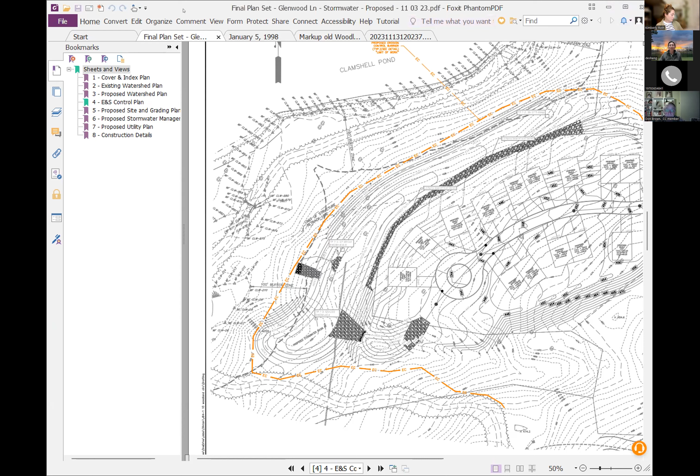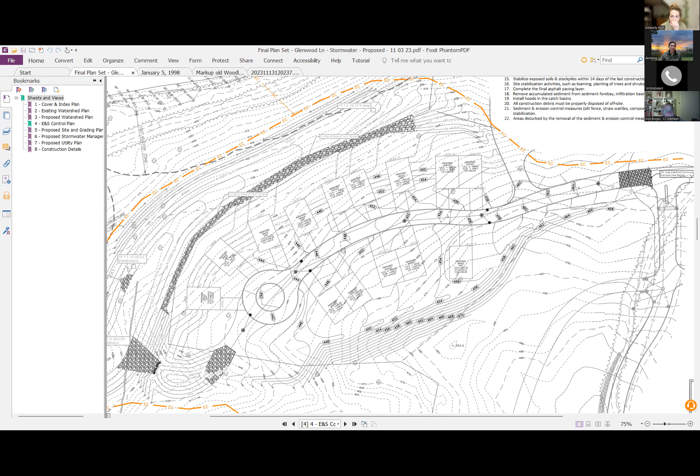Right, so this is the Glenwood section. If I enlarge it, you can see those units are all there. The original design is basically the same location, but they didn't have the soil testing. This section was much shallower with the ledge, and it's in a much lower grade. So we made a very broad, shallow swale coming in, which will catch pretty much the same stormwater.

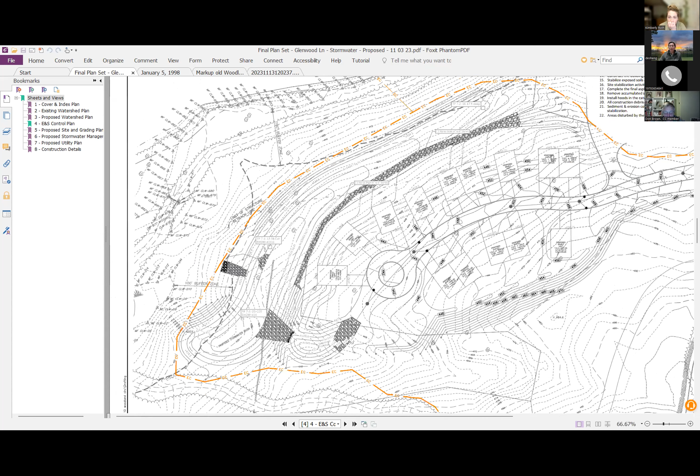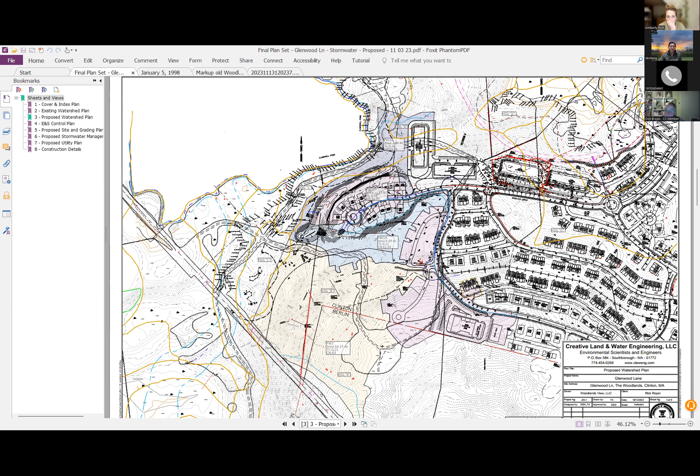So if you go to the watershed plan, you will see the watershed coming here to this basin at the pink area. So we shifted it. And also, if you're looking at it, we have a sediment basin, and also a long swale behind those houses.

So we didn't really change anything, to be honest, from the road drainage. I don't see any difference from the previous approved plan. We used the new NOAA Atlas 14 data, and that's basically the difference. If there's anything we changed, as I said, it's basically the basin. So I don't see any difference from the compliance standpoint.

Last time, the stormwater management standards were pretty much the same, didn't really change significantly, except that the recharge requirement was updated, I believe, from the previous design. And the precipitation data is updated by the NOAA Atlas 14, which we applied and complied with fully. But we were waiting for the peer review to comment on it. So other than that, I don't think we changed anything. We separated the watershed from the previous one, so this is the watershed area contributing to the Clamshell Pond side.

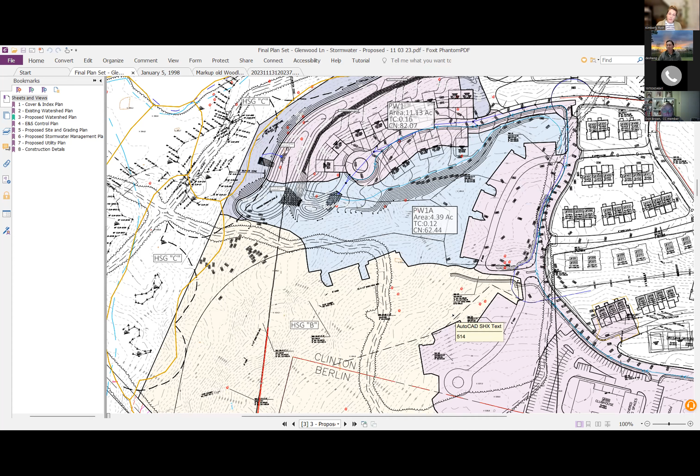In order to get 80% infiltration off of an infiltration basin, it requires pre-treatment. So what is the pre-treatment for the infiltration basin? The pre-treatment is this - the road drainage deep sump catch basin goes into a pretty much separated big forebay, which is much bigger than actually required.

So you have a sediment forebay - great, yes it has, and then they go into a basin. This is all separated by a good 5-6 foot berm, so it's almost like a little basin in the forebay cell. So this two adding together is a 44% removal, whether you consider that an infiltration basin or not. If you consider it just an extended dry detention basin, they don't even require 44%. So looking at it both ways, it will meet the TSS removal rate.

Okay, thanks, Sheng. I think that's most of my questions. I think there was some discrepancy on whether or not it meets standard 2, but we're going to get a third-party review on it, so this is just more for conversation.

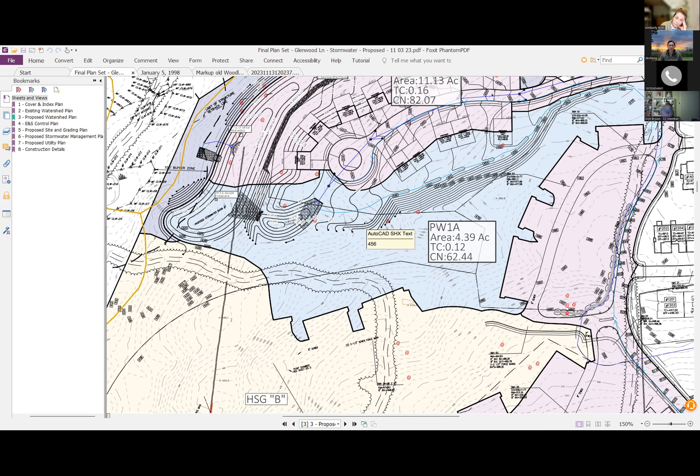The two issues are about the peak flow. In the DEP stormwater management standards, they don't actually have a volume requirement. So I calculated, if you look in the report, the volume is just a very minor increase, but the peak is significantly less. We did all storms from 2 year to 100 year. If I don't do the middle ones, it's a little bit off, but for 100 year it's a perfect match for volume. But for peak, that's what standard 2 actually requires.

The peak discharge for the 2 to 100 year storm is less than existing. They don't have a volume requirement. The volume is only required for recharge to the groundwater, which we far exceed. Just the static volume itself will meet the recharge requirement, so we don't even need to count on infiltration for that purpose.

Any questions from anybody else or comments from anybody else on the commission? No, aside from waiting on the DEP, everything you already highlighted, and I would also be leaning towards the peer review.

Do we take a... Can I make a motion to go out to peer review? I mean, third party review. Do I have a second? Dawn, would you be interested in seconding a motion for a peer review on the stormwater report? Yeah, I second. Okay, take a vote. Rebecca, aye. Dawn, aye. Okay, so we will get a peer review on that.

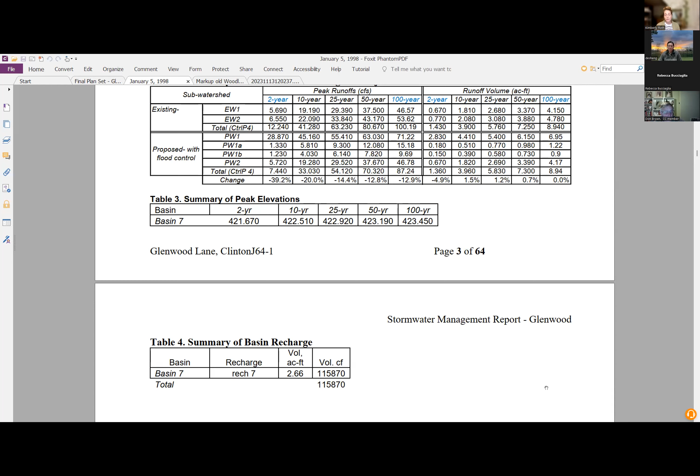Right now, the new information was introduced. We discussed the new information. We don't have a file number from DEP, which means they haven't completed their cursory technical review, and we can't move forward without that. We're also getting a peer review on the information that was submitted, so we will be continuing pending that file number and pending that peer review.

So does that mean, Kim, that no activity is supposed to be going on at site? No, it means that they can't build this stormwater basin until we approve the plan and design.

If there's activity going on in the woodlands, which I've received some complaints about, Desheng pointed out where that was on the map, and it's outside of our 100-foot buffer zone to the pond, which means it's outside of the Conservation Commission's jurisdiction. It's just for soil testing, which is exempted under the wetlands protection act. We don't have oversight of the entire woodlands development complex. We only have jurisdiction over 100 feet from the top of bank from Clamshell Pond.

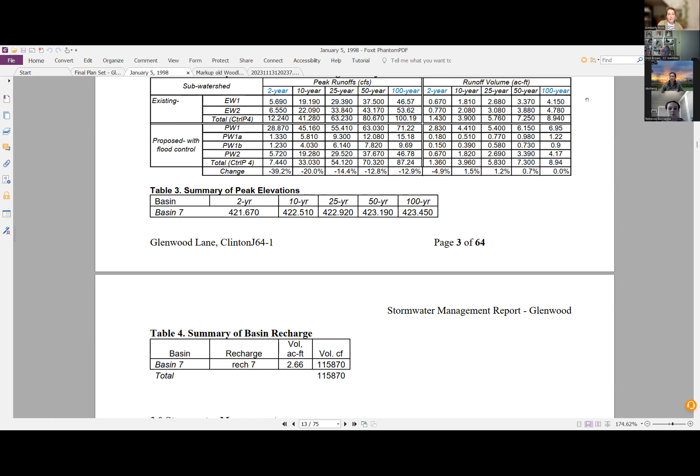We'll see you next month, Desheng. You'll keep us posted? Yep. So whatever progress—we'll send a message out once we have an idea of what's going on with the peer review.

Everybody's so busy these days. I know, that's my concern. Myself, I'm totally jammed. If you want me to do another one, it'll probably be two months.

Well, we'll see what happens. We can always—if the peer review doesn't come back, you guys can request a continuance, so you don't have to come and say, you know.

Or to start, do we have any town engineer or contracted town engineer? No. Okay, yeah, I feel this case should be relatively simple.

I understand, Desheng, because we're already going to kick the tires on all of this. I know the standards, but I'm not an engineer, and I'd just like to have a peer review on this.

Yeah, it's not like there's a significant change in any layout. Well, we'll continue this so we can have this conversation next month. Okay, thanks for your time.

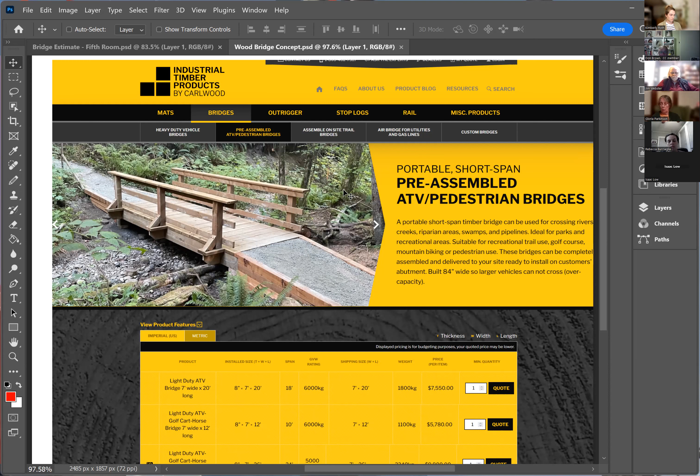Again, you can see for this type of design, it is wooden, and therefore so is the bridge part. We're really interested in having that Trex non-slip surface for the ADA aspects of this project. Also, with the wooden bridge, there's going to be maintenance costs. So given our druthers, we're in favor of - go back, Jim, to the first one that would be customized. Again, I talked to the gentleman at the firm, and they said they couldn't show us what it would look like because we'd have to pay $400 for them to produce a picture.

We don't actually have that money yet until we come out of this situation of the NOI hearing, because at that point, the whole project gets turned over to the town, since the project is over $50,000, and therefore goes to the town building committee.

The funding for this was discovered to still be in the town purchase money of Rauscher Farm. There was an article, not this June but the June before, that allowed what was left over in that budget to be repurposed, since it could only be used for Rauscher Farm, to make ADA accessibility improvements there. So there is funding for the project.

So we did meet, Jim, Dave Sadowski, and myself, and we thought it would be advisable not to remove the plants on the side that we have in the design, the seeding for the wetland plants. We all felt it would be advisable not to take them out, because given climate change and everything else, if they are in the design and we need to do something, we don't have to come back and do a whole NOI process just to get more seeding in that area.

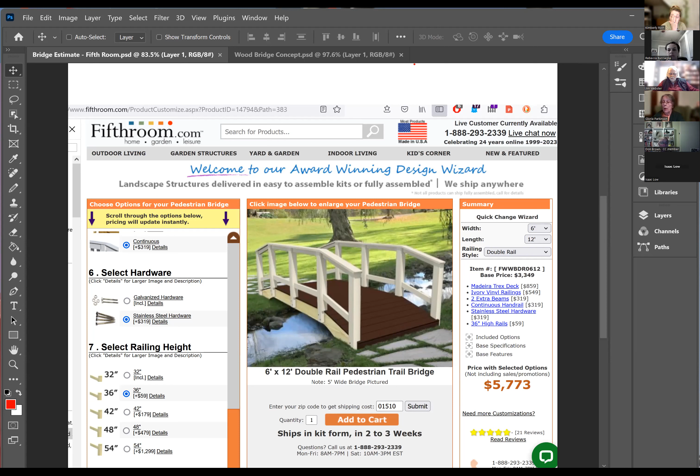It's all buffer zone. Can I make one other observation? I don't know if this is so, but if you look at that area now, by observation it's almost turning into a monoculture, and part of our brief is to introduce diversity on Rauscher Farm. If you go up there in the fall, it's beautiful, but it's just goldenrod going bananas. I've got a photograph somewhere to show it.

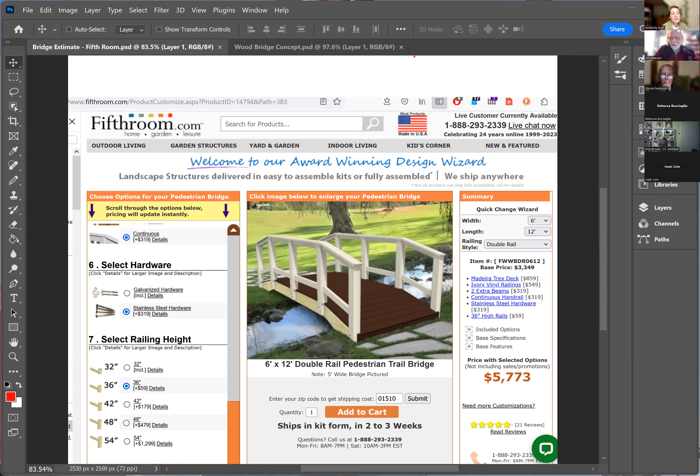So I think this is the replication area on the plan right now. We can't see it yet. I can blow it up. No, I'm still looking at the bridge. Oh, you can't see it? Funny, I see it on my screen. Why is that? We are viewing... oh, maybe you're sharing the program versus your screen, so you can't move between. Oh, you're sharing Jim's screen, is what it looks like. I just don't know how to do that. Just stop sharing and then share again. Okay, and share again. There it is. There we are. Okay, I'm trying to navigate this thing. Oh, here. So here's the replication area right here.

What we have right now is we had to stop and direct foot traffic to Clamshell Pond. We blocked off that area, and it's been very happy, because people used to walk through it as a path. That area has become exceedingly delighted by the fact that no one's trampling through it. Sometimes when we have these impacts, if there's still a significant seed bank of the other existing plant varieties, it will just regenerate itself, and that's clearly what's luckily happened here.

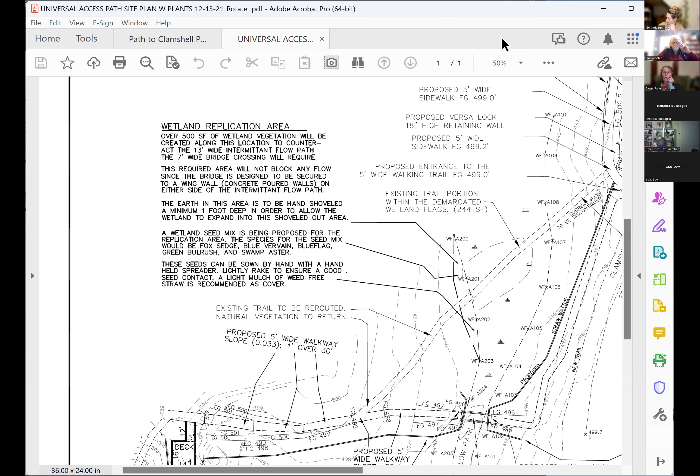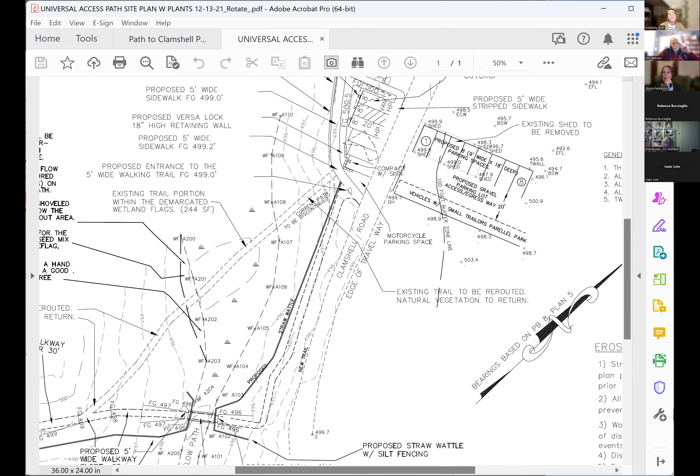So, coming back to this, would we now need to redo the whole design? I think because it's minor, I agree with what Rebecca was suggesting: that we write a condition allowing Rauscher Farms to do some plantings in the proposed area to introduce species diversity. We could write it that way, and then note that it's no longer considered a replication area, since no BVW impact is proposed. It's more of a restoration, or you could call it a resiliency planting - climate resiliency planting. That would be great, really an enhancement or something along those lines.

Because we are embarking on doing a climate resiliency review for all of the habitats on Rauscher Farm, this language can stand - we'll just leave it as is. So we believe what we have done fulfills what was requested from that site visit, and we have all the other pieces good to go in terms of handing this over to the town to execute. I think you've fulfilled all of our questions as well. That's my opinion. I would agree.

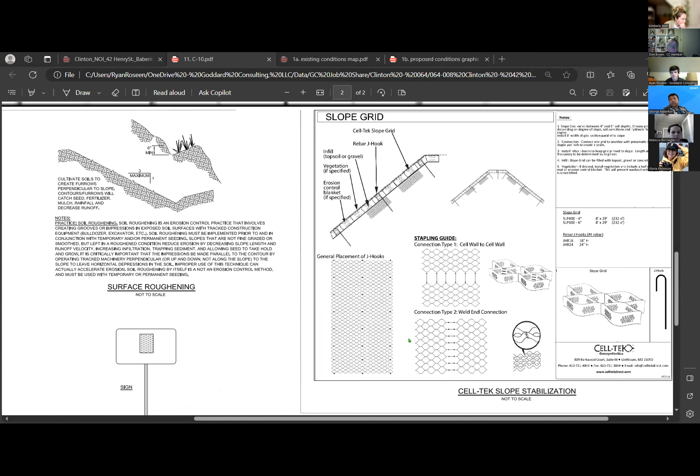And for this larger slope, we're proposing to use the Cell-Tek grid stabilization system - here's a detail of it. It gets put on the slope, anchored in with rebar J-hooks, and then you infill those with topsoil, and we'll seed over it with a native meadow mix and just let it be.

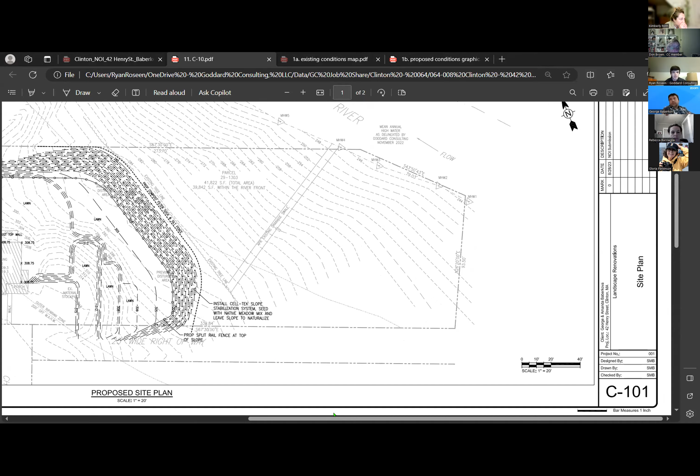So let me go back up here and zoom in a little bit so you can see it better. Along the top of the slope, since it's a fairly steep slope, we're proposing a post and rail split rail fence for safety reasons, and as a physical demarcation not to go beyond that area and not to manage that area once it's planted.

Where's your 100-foot line? So the 100-foot is right here, this dotted line. Let me go to... I had another file open, that did it, but it's hard to see - it's this area here, it barely comes this way. So it is a little bit within the 100-foot riverfront area.

This area is already sort of lawn, so we're just making it into meadow habitat here, and then it'll be left alone. So there won't be any disturbance within the 100-foot.

And then over here, this is really the only new impervious surface - a small retaining wall on this side to create more of a level area along this side of the house. A number of trees on this side, not shown on the plan, are proposed to be removed - I'm not sure on the sizes of those. And then we're planting Green Giant arborvitaes in this area.

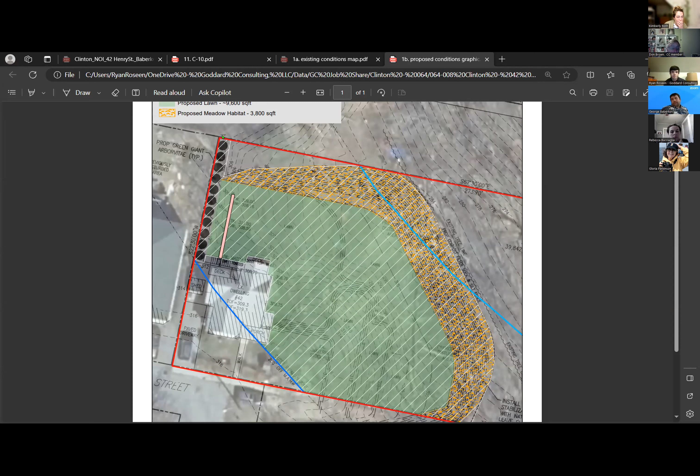So this whole area in green will be lawn, that's where the proposed grading is going to be. The whole orange area is the meadow habitat, and the light blue line is the 100-foot line, and this is the 200-foot line. So that's basically the project.

I'd be happy to answer any questions that you guys have.

I have a couple questions - the Cell-Tek that you're using, what material is that? Is that a material that composts and biodegrades over time, or is that something that will remain in place? I'm not entirely sure - George, do you know? I think it's made out of like plastic or rubber, but I'm not entirely sure.

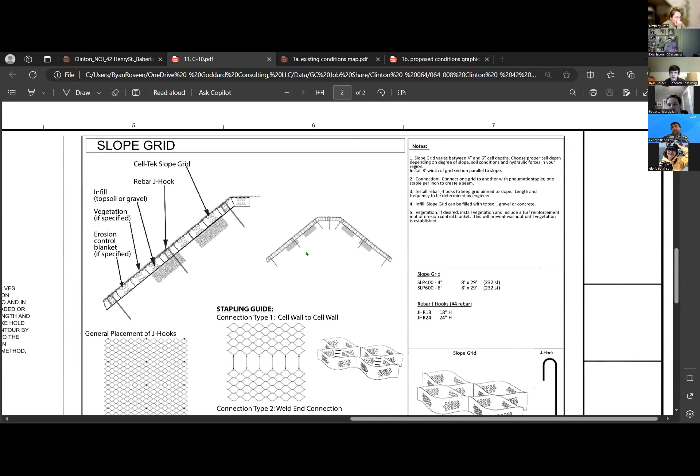George, do you know? Yes - it remains in place to hold the soil in place, as well as potentially, when the vegetation grows, will provide extra support. Right, but so it doesn't biodegrade or compost in place or anything like that? I don't believe so - I think it's meant to be a permanent stabilization.

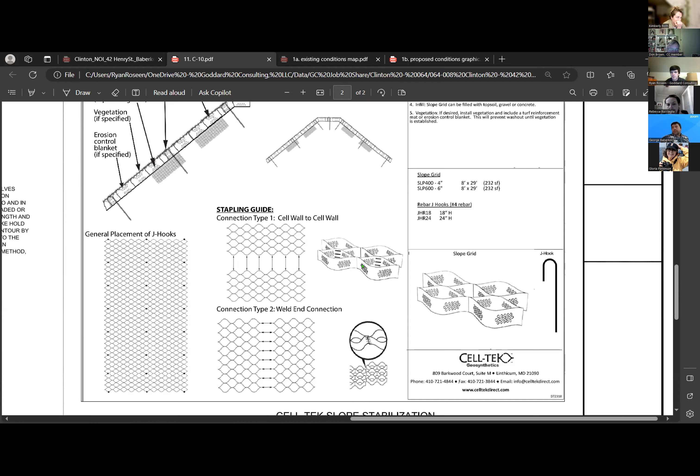Did you include a spec sheet of what that material is in your submittal? I didn't see it - for this Cell-Tek stuff? No, this is the only detail that we submitted. We can probably get some more information on what it's made out of, but this is all the information on the Cell-Tek stuff that we submitted. Okay, thank you.

I believe I sent a bunch of things initially that are in a Dropbox file - I'm not sure if you guys have access, but we can resend them. All I have, in terms of what's been submitted since the NOI, is just Ryan's PDF of the NOI with the plans.

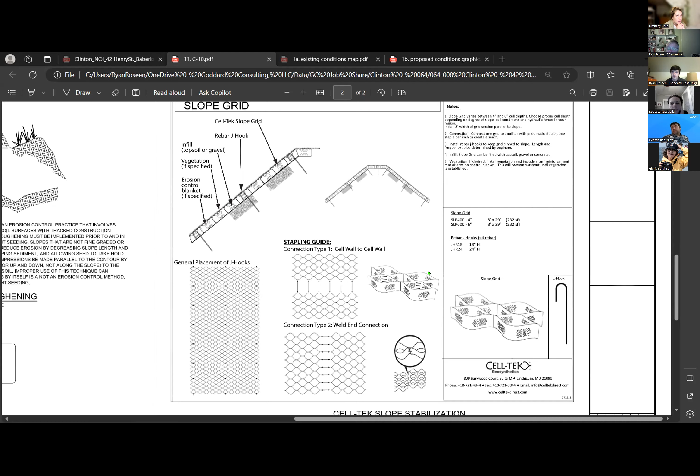Talk us through, Ryan, how this meets performance standards for riverfront area.

So I can go into this, this was part of the submission. We did this under redevelopment because a portion of it, you have the house in it, it's previously disturbed and degraded. It is below that 10%.

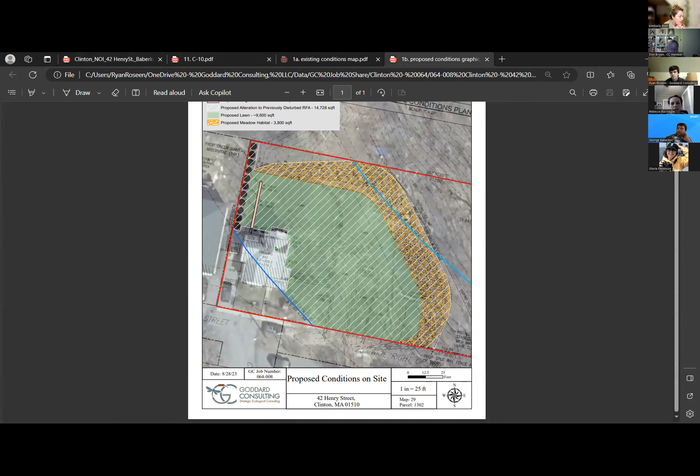That's not how I interpret the regs. If you were to be tearing down the house and proposing a house in the same spot, that would be degraded. It's lacking topsoil, it's lacking the ability to be a functioning riverfront area. Perhaps the top of slope where the driveway was, but lawn is not degraded. And we can't look at the big old pile of dirt as degraded, because this is under an enforcement order, correct? That is not existing conditions that we're now coming into as a previous degraded thing.

So I would like to see you show us how this meets performance standards for 10.584, under new development, or some sort of patchwork between the two. But the slope, the lawn and slope, it does not fly for me that that's degraded.

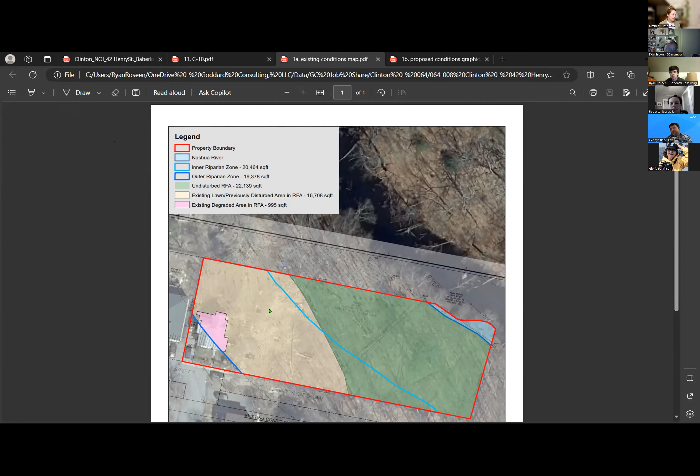No, we're not saying that this whole area, the slope that was brought in, we're not saying that that's degraded. We're just calling the house degraded, and then the whole area where the soil was brought in, the existing lawn, is just previously disturbed. I know it doesn't really mean anything in the regs, but that's how we're classifying it, as those two sort of things.

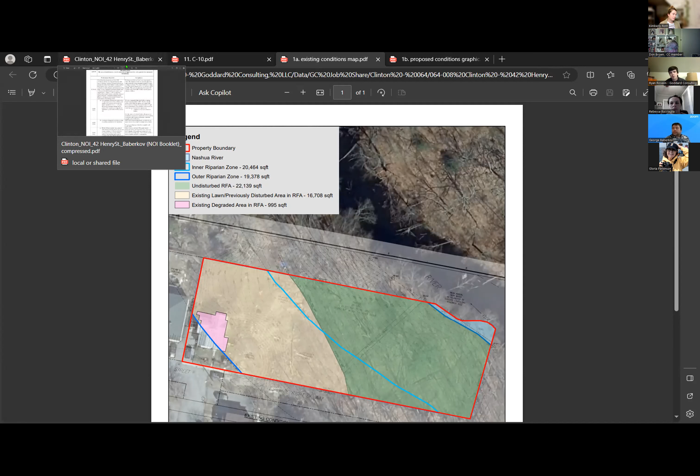But we can submit more information on the new development standards, or sort of a mix, and get back to you on that. That would be really helpful, because I'd hate to start discussing this and going down a rabbit hole and then end up right back to this conversation.

Do you have those calculations, or is that something that we need to continue and reconvene on? So the calculation, so I moved you guys to these calculations here. So existing riverfront, total and broken down here, existing degraded. So I see those.

So one caveat with throwing this under 10.58(4) is the statement that the issuing authority may allow a certain square footage, etc., provided that a 100-foot undisturbed vegetated buffer is provided, and you guys are proposing alteration in the 100. So I understand that you're proposing to restore it to more of a wildflower meadow. You're going to want to call that out more clearly.

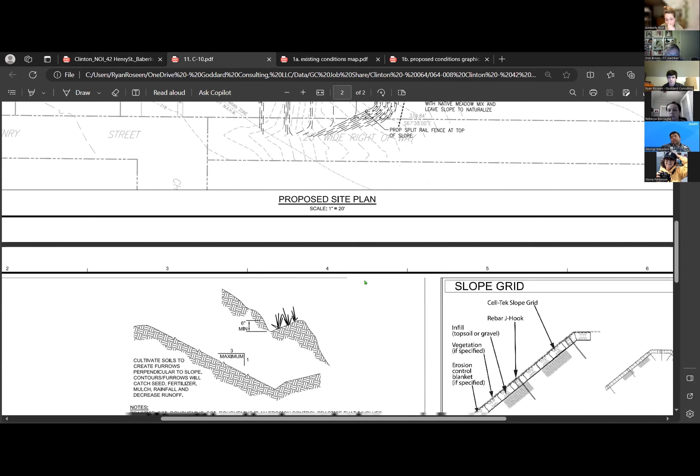That is really steep. I know, and that's why we're using the Cell-Tek grid slopes, because originally we had a plan for retaining walls on all these areas, but that was going to be too costly, and you'd have to get an engineer if they're more than 4 feet tall and all that stuff.

Okay, I'm sorry George, did you say what the slope is? Did I cut you off? You have 1-to-1 at the Cell-Tek, and it basically gets smaller as it gets into the smaller areas.

What was the slope pre soil importation? On the side over here — I can't see where you're pointing, George. Just say top, bottom, left, right. Bottom, where you have the outer riparian zone, it used to go almost 1-to-1 until it hits — I want to say probably 300.

So I'm guessing this is sort of where the pile is. Everything beyond this, all of this over here, and it's hard to see under this, but that's sort of the natural slope it looks like. When you calculate up the other stuff for us, just tell me what the existing pre soil importation slope was, and then what the proposed slope is, just the numbers. So we have it in the documentation, and we can talk about that. Okay.

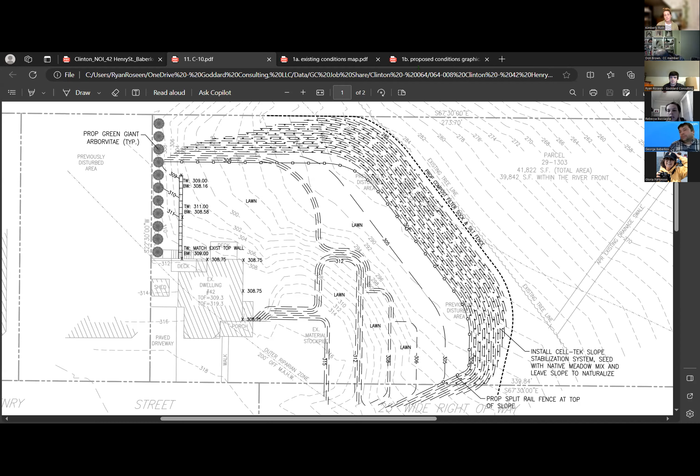Okay, next we have a notice of intent for 4 Craig Drive.

Hi, this is Patty Burns, can you hear me? Hi Patty, I can hear you. So we're back again for these 4 trees and all the other stuff, but yes, go on. The current situation that I'm aware of is that we submitted an NOI in early October or late September to the town and to the state, and it's still sitting on their website as submitted, but nothing has moved forward.

You have a file number. Okay, we didn't see it. Did you go to the NOI lookup page? I think so. So it's EEA, I can drop a link in, just for your benefit. We only saw submitted, so we figured it was still under review. So that's good that there's a file number.

Great, hold on one second. Everyone in the meeting, in case you're interested, you can look up any NOI filing in the state this way. So let's go to Clinton, just gonna double check. 4 Craig Drive has been issued file number 135-0302.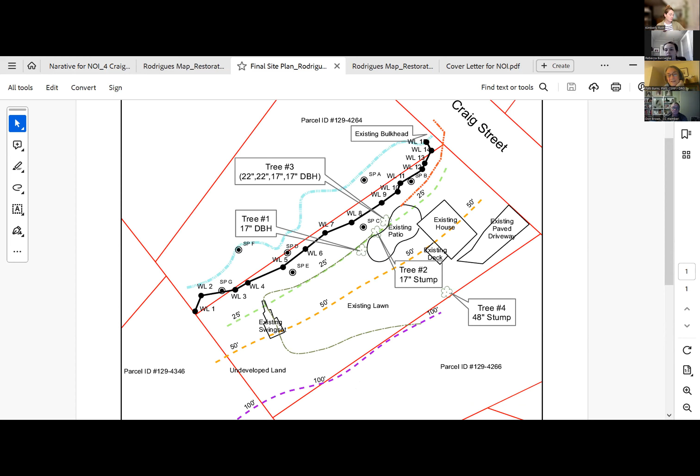How long did it take you to get us the notice of intent? It's not like you've been in front of us every month with the same notice. We had - because we lost 2 months of the notice to the abutters. It took 2 months for us. What is that, how is that our fault? The town didn't provide it to us. So it's somebody else's fault, not the Conservation Commission's.

Okay, so the answer to the question was, we're taking it down to grade for the restoration work, as that was part of the plan. Just to refresh our memories - I know we're not putting in something that grows as tall - is there a replacement proposed for the trees?

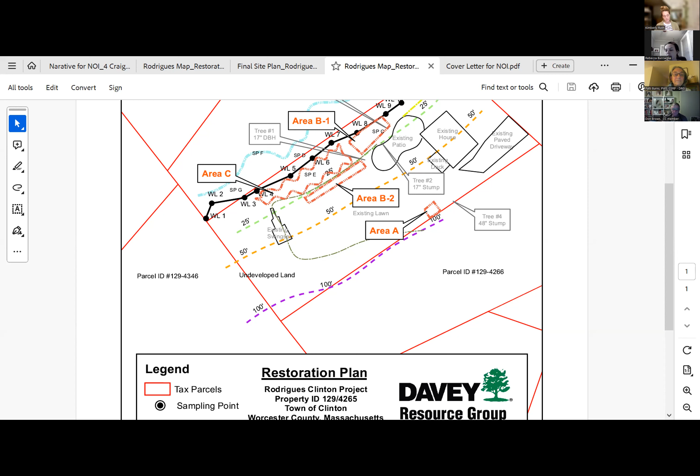Yes, this area C is a large area where we opted not to put in anything tall. I didn't expect to have to go to the restoration plan tonight, so let me see if I can find it. I think that's it - it's called Schedule for the Restoration. And this is where we had the alternative.

You could put in a red bud if you couldn't find one, or if the town didn't like it, we'd be happy to do a flowering dogwood or a serviceberry. I don't know if any of those are problems. Flowering dogwood and serviceberry are great. That would be for area A, so area A had that as our recommendation. But we've been through all this in the past. I was just asking if there was a replacement for the other trees over by the edge.

Patty, we appreciate that information, which addressed Kim's question I believe - so yes, there are replacements for trees that are being taken down. Great, I do not have any other questions.

Do you have any other questions, Rebecca or Dawn? I do not at this time. No. Just one last thing - anybody from the public for this particular hearing? Don't see anybody, and I'm not seeing any hands raised, so I would entertain a motion to close.

Motion to close. And so where does that leave us? We are closing the hearing and moving on. A second, yes.

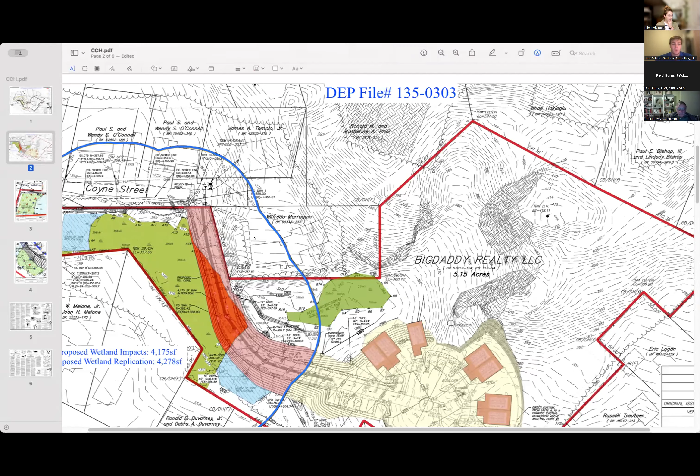So we'll move into the notice of intent. This does have a DEP file number, that's DEP file number 135-0303. That is for the building of an access road to the uplands back here, where a cul-de-sac with 5 houses and 9 residents will be built.

These are outside of the buffer zone to the BVW shown in this blue line right here. We are going to be filling a section of the BVW, and that is going to be 4,175 square feet, shown in red right here. The rest of the road will be impacts to the 100-foot buffer zone shown in pink.

We're going to be doing 4,278 square feet of wetland replication split into 2 areas, one being 2,196 square feet of BVW replication in the western portion of the site, and then another 2,082 square feet of BVW replication down in this section.

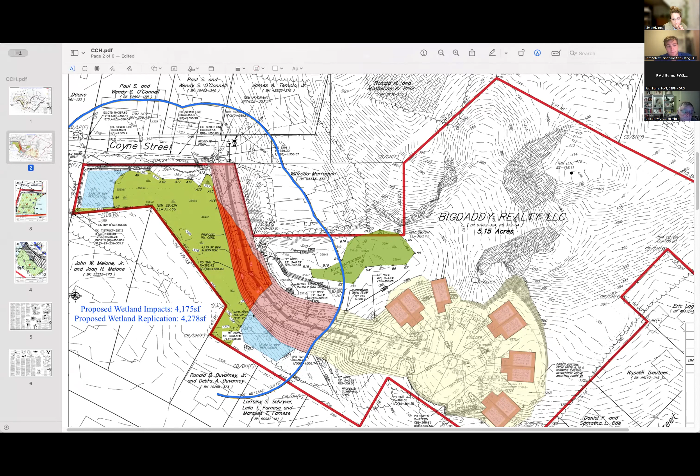We'll briefly look at the replication areas and the plants that are going to be in them. So we have a mixture of trees and shrubs in these. In this replication area, we have 9 trees and 39 shrubs going in.

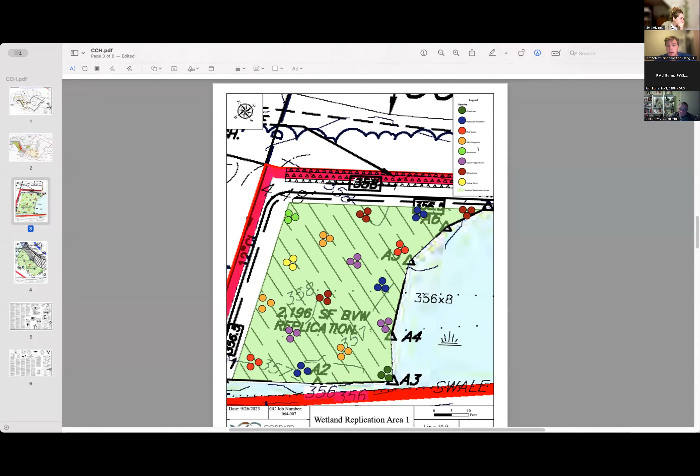That consists of green ash, high bush blueberry, red maple, silky dogwood, spice bush, sweet pepper bush, winterberry, and yellow birch. And then this is the southern replication area, the smaller of the two.

We're going to have similar species, that being green ash, high bush blueberry, red maple, spice bush, sweet pepper bush, and yellow birch. We're going to be having an increase of BVW on the site through these replication areas, and we have a net gain over what is being lost through the building of the access road.

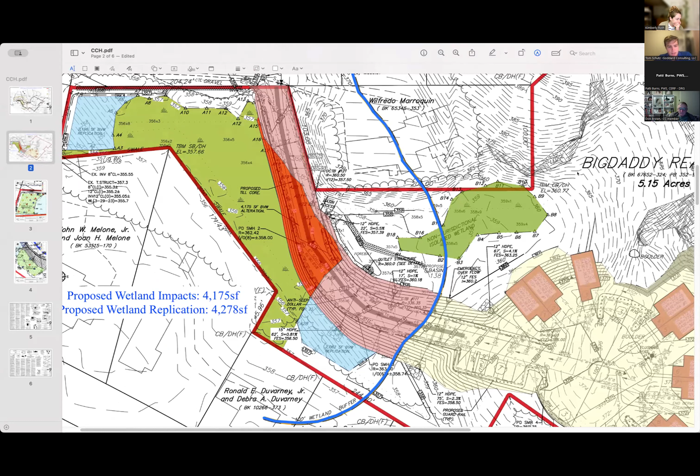I'll let Mika discuss all of the stormwater standards for this, and he can run you through all of that.

Okay, if I could share my screen. Tom just has to stop. Yep, there you go. All right. My name is Mika Lassell from Topper Land Survey, and I'm going to try to share my screen. Right, here we go. Is that sharing? Yes, just real quick, Tom. Oh, never mind, never mind. Continue.

The property that we're working on is owned by Big Daddy Realty. It's 5.1 acres. This is the existing conditions plan that depicts the overall drainage area of the property, outlined in blue, as you follow my mouse. There's 2 main subcatchments: subcatchment number 10, subcatchment number 20.

We analyzed 2 points of analysis, one being in this corner of the property. There's an existing outlet structure at that location which ties into the drainage system connected to Coyne Street. That existing structure is kind of dilapidated, in poor condition, collapsing, and that's something that needs to be addressed, but again, that's not on our property.

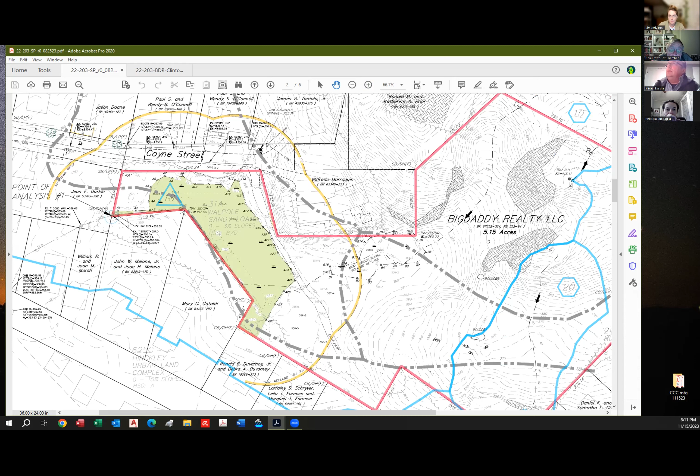So we have conditions of wetland areas and shallow depths to bedrock. We were really limited in what we could do from a stormwater perspective, particularly meeting the recharge requirements. That really kind of dictated how we approach and develop the property.

So what we have proposed is an improved access along the existing car path that comes into the property, and extend and end with a cul-de-sac meeting the subdivision dead end requirements for turnout. We initially proposed a T turnout.

What we're proposing is super elevating this driveway and directing the runoff towards the low point non-jurisdictional wetland via deep sump catch basins, going through a stone dike filter, and then ultimately an outlet structure control out underneath the driveway. We have an emergency overflow here for larger storm events.

Keeping in mind that we are limited with what we can do from a recharge perspective and a water quality perspective on the property.

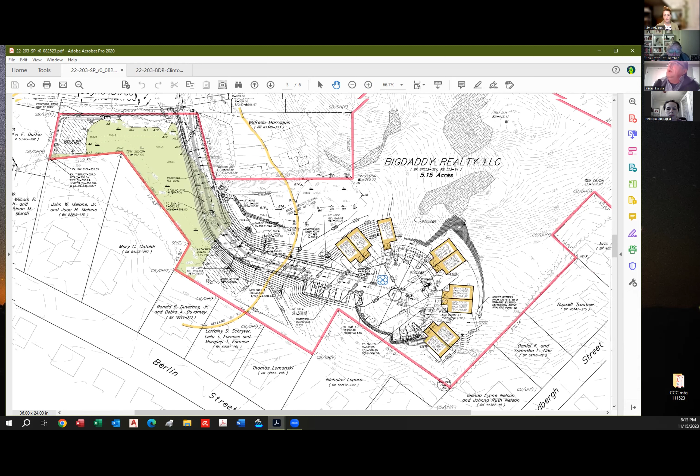So what we're proposing here in the recharge, in the replication areas that Tom is noting, we're carving this out and directing the water from the outlet structures into this low area here, and ultimately it follows the swale.

When we met with the DPW, our initial intent was to do pressure sewer. After analyzing, videoing what's in Coyne Street, it was discovered that by the Kilmurray intersection with Coyne, the sewer line was in poor condition.

The DPW recommended that we provide an additional manhole on Coyne Street at the terminus, at the juncture where our driveway comes in, to further facilitate future maintenance of that line. And his preference was that we do a gravity sewer.

So that kind of forced our layout of how we are connecting with water and sewer, keeping those 10-foot separations that are required. And that kind of dictated the width of our driveway to 22 feet to be able to meet the offsets and fit the structures within the street.

The 22-foot width is the minimum per AASHTO, and for traffic safety. It's a driveway, not a road, but we were trying to satisfy most of the access issues that potentially could happen onto a development such as this.

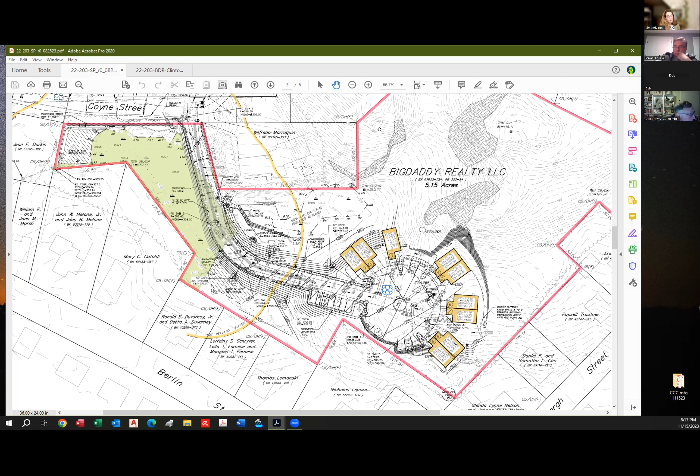We are not crossing a wetland to get access, we are filling a portion of it. The existing cart path... oh, did I just lose my screen?

You minimized the window. No, my Adobe crashed. Gotta reopen it.

So it sounded as though, and I'm not trying to put words in your mouth. Oh, okay, you pulled it up. I thought it was going to take you a minute. Did it come back? Okay, yep, my Adobe crashed.

There's an existing approximately 10-foot wide cart path that comes into the property. I hear what you're saying, but I think 22 feet for a shared driveway is really big, and I think you guys should demonstrate that you have adequately avoided and minimized prior to mitigating.

The absolute most narrow that the fire code allows is 18 feet. But the problem is we have water and sewer, and fitting the structures within there, meeting the setbacks between utilities within the street becomes problematic once you start getting narrower than 22 feet. I'm not an expert on the fire code, but explain to me where the 18 feet comes from, when in many communities it's 12 feet for a shared driveway.

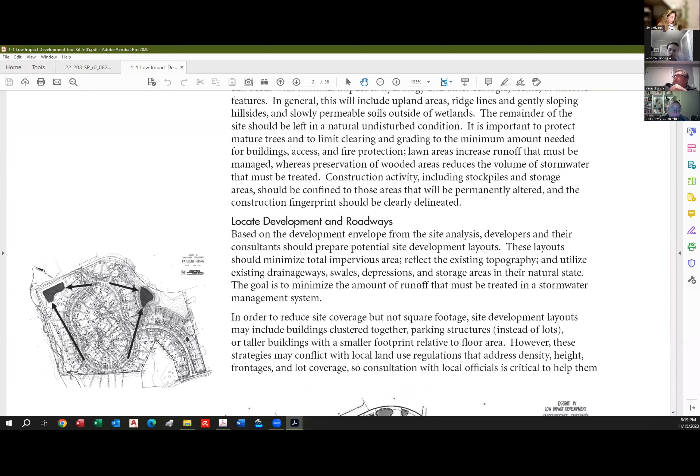Well, there's 9 units here, so from a traffic perspective... Okay, so that's not associated with fire then, it's associated with traffic. It was traffic and fire. Okay, so there's a difference between public safety, like getting emergency vehicles in, and traffic that you are proposing to cause by the number of units.

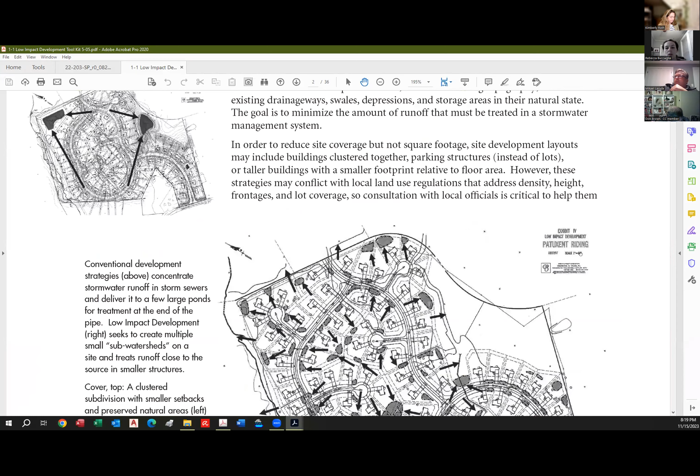Relating that back to the Wetlands Protection Act and the space that you're proposing to go into the resource area for, that's the way we're thinking about this. So you have pulled up something, can you reference for the record what you're showing?

That's a street. Right. Did I lose that? No, my Adobe is just crashing. Lost it, but the minimum street width is 18 feet.

I see that, Massachusetts Fire Marshal, 18 feet is the minimum. National Fire Protection Association, right, 20. That's for a street, not a driveway. Correct, but this is functioning essentially as a street. We have 9 units, so it's not just one driveway for one residential lot.

You're still going to have the turnaround from a safety perspective, from a planning perspective. The turnaround isn't what we're questioning, it's the width of it, which is further into the property away from the resource area. I think you need to clarify in your application or provide a supplemental narrative that says this is a street and not a driveway.

Because unless I missed it, it is a driveway. It is, that's what it is. Okay, so then we need to isolate that and say it's a driveway, not a street, and therefore it needs to meet the driveway requirements.

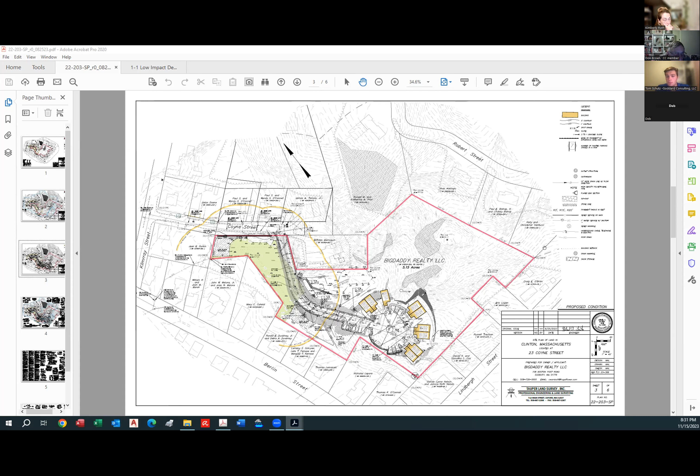We have water in our basement constantly throughout the wet months. So that's my concern. I think it's a fair concern, and I think your questions are valid.

Would it be helpful for Mika to explain where they're directing flows more clearly? Yeah, well, I guess I want to be assured that I'm not going to get any more water than what I get in my yard today, once this project is done. And if there are issues after the project is done, if it is approved, who's responsible for fixing them? Or is that just something I have to live with?

Speaking outside of the Conservation Commission level, water crossing onto your property from a development on another property would be legally considered a trespass, and that would have to be handled through civil court. Okay.

Do you want me to walk through more of what's going on with the drainage out there? I think it would be helpful. Are you able to see the screen, Deb? Yes, I can. Currently, the water, how we've analyzed it—you can see there's a dotted line, this is our time of concentration line coming down.

Water comes down this hill, it's all exposed rock, and it hits the flats where the wetlands are, just beyond the cart path. It flows to a makeshift swale that I'm not sure who made, but it runs along most of these property lines, very close to the property line. Yeah, it's behind my house. Yep, and it's standing water—it's a swale that's actually level.

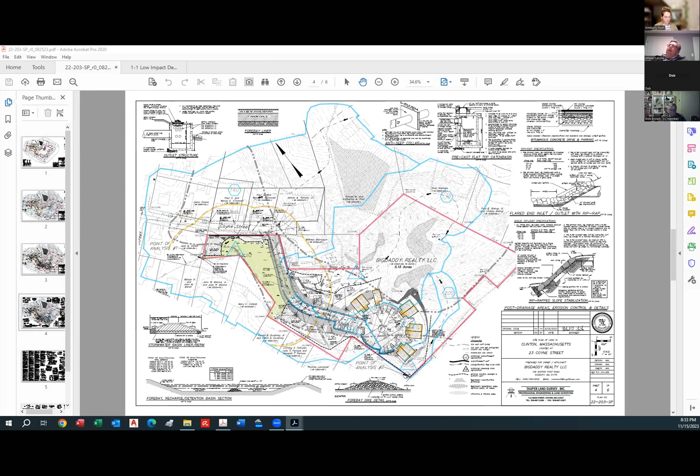So what we had looked at on the design—I'll switch over to this. The blue areas are tributary areas, and this is the boundary of our analysis. This upper portion here that normally came directly to your property is being held back by a stormwater basin. So what we are required to do is hold that water back and slowly release it, matching the rate it was before. But in this instance, since this structure is in poor condition, we looked a little closer at how high this water ponds.

It comes into your backyard, so I'll zoom in a little bit. The peak elevations we were witnessing were about the 358 contour, just below it. This is your property here, so yeah, coming in 25 feet into your property—I can conceivably see this backing up as the existing condition is today. What we're proposing to do with the wetland replication is carve this out and accentuate the direction of the water towards the wetland and ultimately to this structure here, which is connected to the street drainage system.

This is something that would need to be approached with the DPW. Again, this is off our property to make any repairs to that. But I think this is the real crux of the matter that's holding back water and why it just sits there, because it's inadequate for what's happening.

We took a look at this multiple times. We've been out there, took photos, and opened the structures that we could. There's a manhole here that we could not locate that's supposedly here. It's in one of the neighbors' yards, and we're not sure exactly where it is.

But within this network, starting from approximately this manhole out towards Berlin Street, the standing water level within the manholes is at the pipe outlet inverts, and that was in March. We took some photographs of what was going on in these structures, and around the backs of the properties, just to get a feel for what's happening during the spring and wet times.

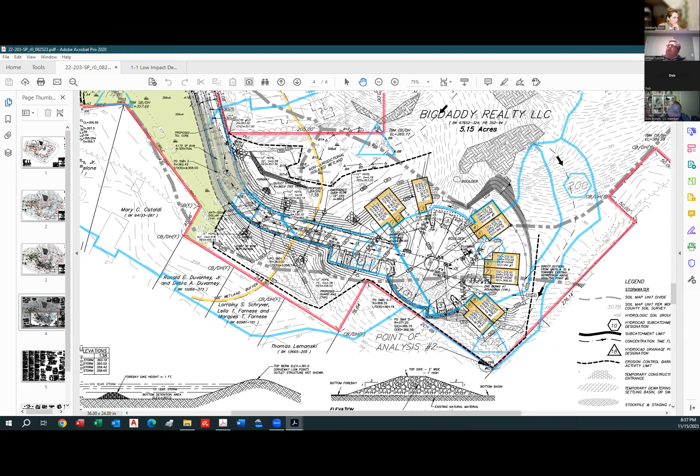So we took that high water mark, and that's what we were matching before and after our development goes in. So what this development is doing, across all these areas, including a portion going out towards Lindbergh, we're catching area here, minimizing what's coming into this point, and reducing the overall rates going ultimately to this corner by the Durkin property and Marsh and Melone properties.

There's some rebar and a metal cover on it. If you're familiar with the area, you've probably seen it. It looks like someone made a makeshift cover to keep kids from falling in. So it's not ideal, but again, that's not our purview to repair. We were trying to match the existing conditions of what was going on with the stormwater.

So my husband grew up in this house, and he says it goes under Berlin Street, across the street, and all the way down to near Town Line. The water goes there and ends up in Berlin Brook. And it's all grown in, so I guess it just doesn't work anymore.

Yeah, this leg here ties in. We opened these structures here, and went and opened what we could. These are all in good condition, but this leg here is the problem, which I think is causing some of the ponding issues, and ultimately helps create that large wetland system out there.

Okay, I hope that helps clarify a little bit. Yeah, I mean, it does, as long as the town does what they're supposed to.

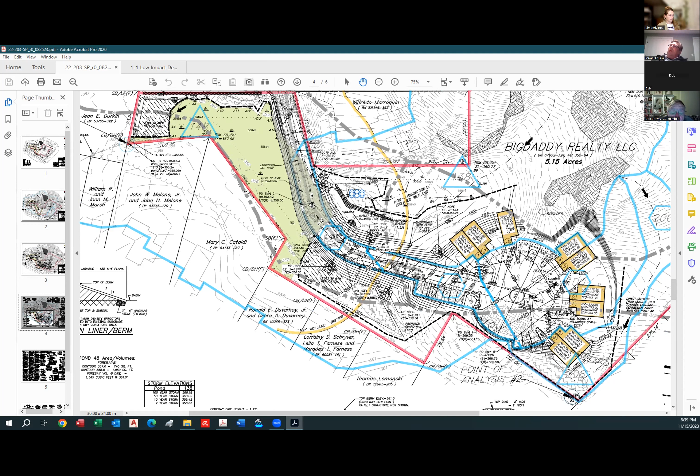How high will that road be built up? Our utilities are going to be laid down first, and then it's going to be backfilled with dump trucks, filling it up and building it up with equipment. Yeah, but how high? You know? Yeah, the elevation at this—I'll zoom in.

The existing grade here in the flat part is about 4 feet at the lowest point, and it's slowly building up. There's a natural swale going up, like a ramp, and we're trying to follow that going up the hill. What we've done is a gentle slope going up, so it's not too steep.

Behind my house, how high will it be? You're gonna have a good span of material, before we even start grading there's about 40 feet before we start doing any filling. Otherwise, this area is gonna be carved down and be replicated with the planting plan that Tom was going over. The wetland soils excavated in this location are gonna be relocated here, and the planting plan Tom laid out will be implemented here.

Is it possible to put up a tall hedge of arborvitaes or something along the driveway for privacy? Yeah, absolutely, that could be along here, closer to the property line. Well, yeah, there or the roadside. I guess closer to my property line would be great.

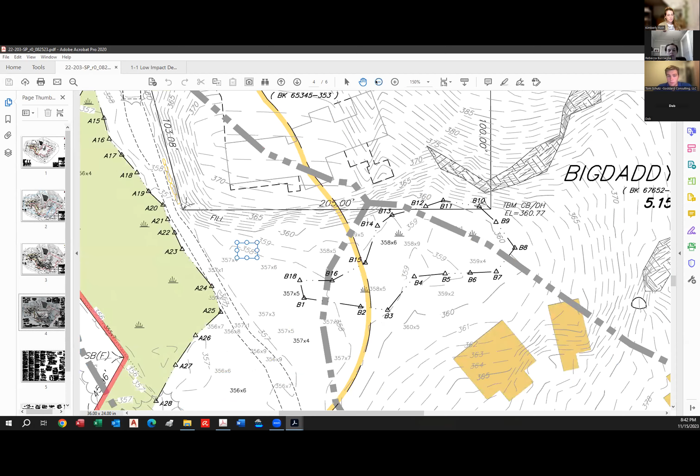Are you going to be clearing out most of, or all of, the trees that are back there? I think you'd be selectively planting, leaving the trees that are there, and excavating around as much as we can to maintain existing.

Correct. Did you submit any sort of tree removal plan? No, we did not, but we can certainly give that to you. We're also gonna be looking at the width of the road, which is gonna dictate the removal of the trees and which ones need to be removed. So I think we'll look into that first, and then come up with a tree removal plan if necessary.

But I know it's mostly herbaceous plants in the area adjacent to where the cart path currently is. So we'll look into that, and in the area where the replication is going to be put, we're not looking to take down any large trees. We're going to be planting around what's mostly red maples, and supplementing the area with new native herbaceous plants.

Okay, thank you. There's a few trees close to my property line that I wouldn't mind being cut down because they're overhanging and I'm afraid they're going to fall on our fence. They have fallen on my neighbor's fence and crushed a section of his fence. Just putting that out there. Thank you for providing that comment.